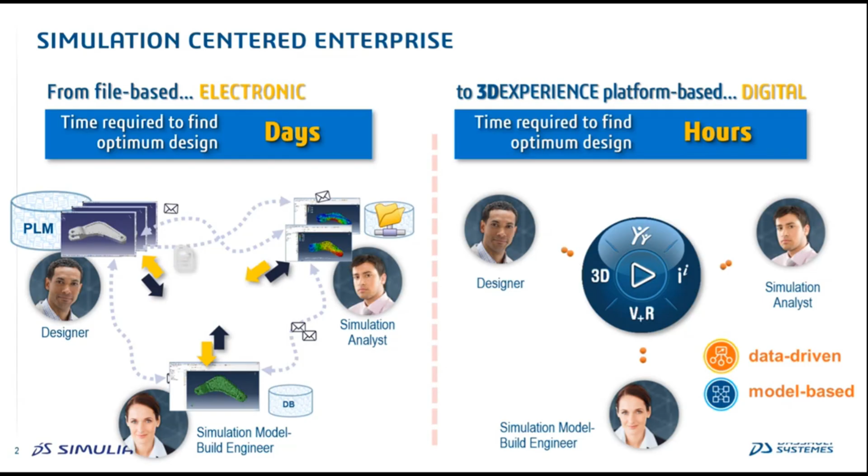You don't have to use email to transfer the data. You don't have to worry about the different versions you are working on. And eventually you actually save a lot of management time, I would say. So this is what we call the ModSim concept. ModSim is short for modeling and simulation. Modeling means somebody who is drawing the CAD, and simulation is someone who is using the CAD file to run the respective simulations.

For instance, you have electromagnetic simulations, you have structural simulations. So this is the part we were focusing on just now. But of course, we can do more. We can do test management. We can do product management. For instance, you have colleagues from the QE department who would like to check the performance. They normally require the simulation engineer to run a few tests to validate their designs.

So they can just specify all the requirements here, and then the people on the ModSim side see the requirements, run the tests, and provide the results. So that gives a complete flow of how we develop a new product. So that is something that is more advanced.

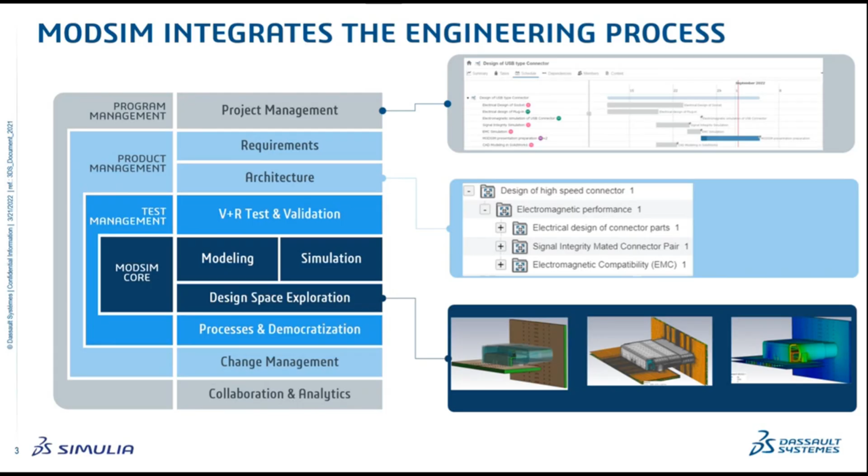in the future. Okay, the first one is the TLM solver, and the second one is DDM. DDM is actually the frequency domain solver. And then the last one is non-parametric optimization. This is something very simple. It actually opens up a new domain to design engineering parts or components.

All right, so let's look at the first one, the TLM solver. The TLM solver is nothing but our transient solver. I'm not sure whether you are aware, but in our transient solver we actually have two types. The first one we call FIT, which is the conventional one that comes together with CST. And besides that, we have this TLM solver, transmission line matrix. This offers a little bit extra on what we can do with the finite integration solver.

Okay, so normally the transient solver is used to simulate very complicated structures, like a mobile phone. If you want to use a frequency domain solver to solve it, then perhaps you'll run into problems like insufficient memory. So when we are using the transient solver, we normally use it for very complicated structures. For instance, look at these mobile phones. We actually have a lot of antennas inside, right? So look at the number of cells.

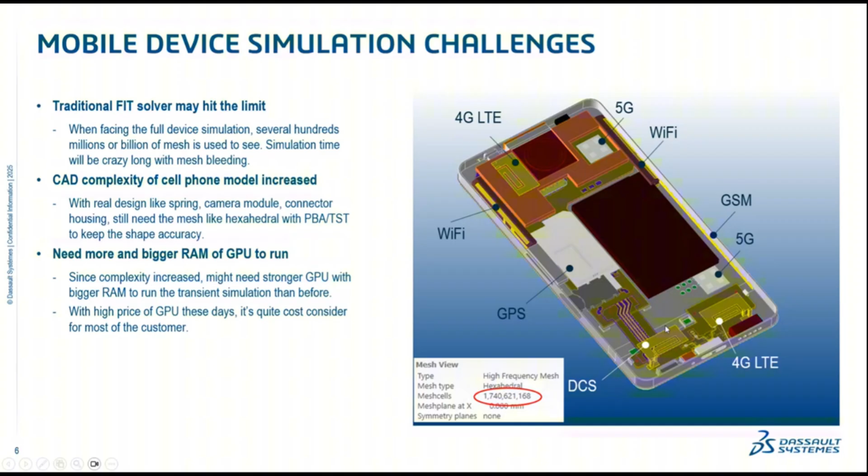It's a lot. Okay. With the conventional FIT, you can see the mesh is going to look like this. But when we switch to TLM, it's going to look like this. It's still the same hexahedral mesh, but over here you can see this area, we actually try to simplify the mesh. For instance, in the area which is not critical, here it is filled with a lot of air. So we try to combine all the cells together to create a cell lumping effect, which eventually brings the number of mesh cells down, reducing the mesh count.

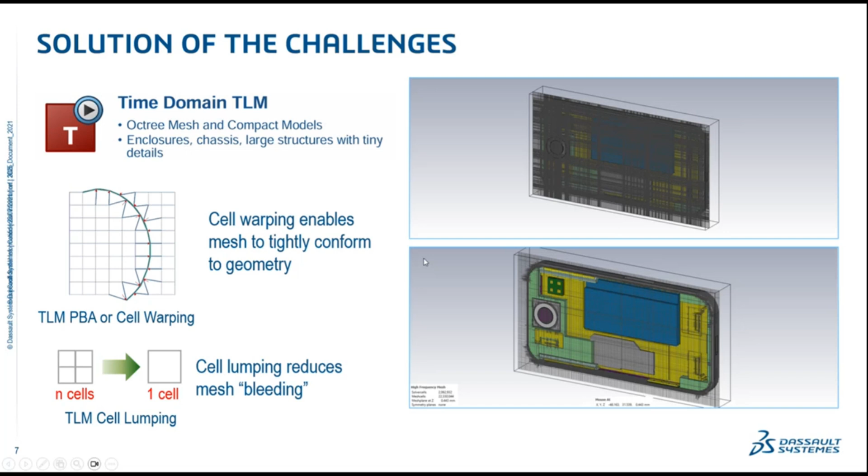That gives us very good efficiency, as in a huge reduction in the mesh count, 99%. So imagine you have 1 billion mesh cells. You end up with 10 million mesh cells. So that's a big reduction, and that will speed up your entire simulation.

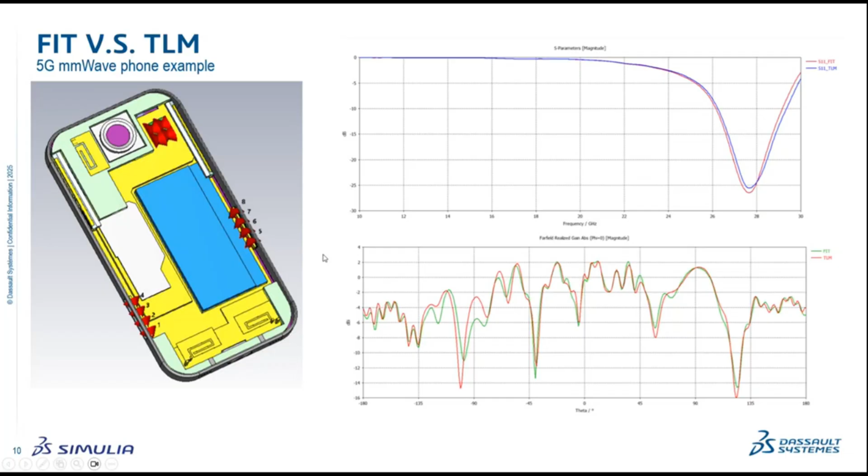Okay, so this is a comparison of the results. You can see this is the S-parameter, and this is the far field result. They are more or less the same. So that means TLM is suitable for these types of applications. Okay, so this is a summary. We are introducing new dimensions to simulate complicated structures.

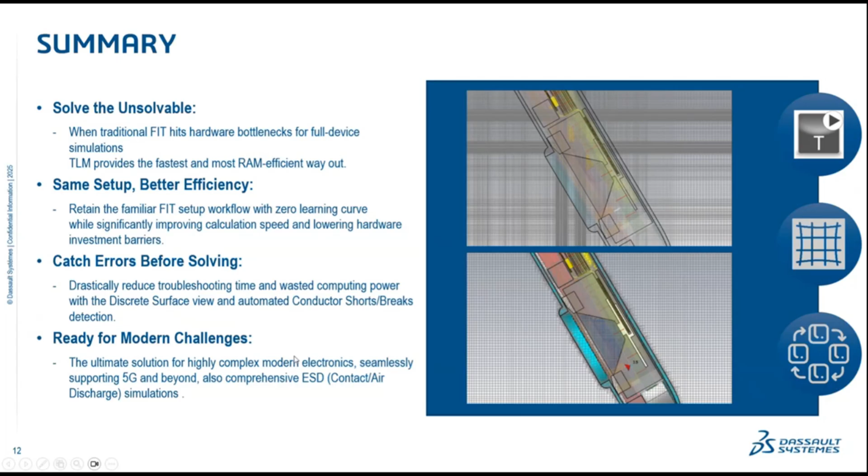It could offer you better efficiency with the same setup. And then I think in modern electronics, I would say that the TLM solver is actually quite suitable to be used.

All right, so let's go to the next topic, which is the domain decomposition solver. Now, this is actually our frequency solver, but they add some extra techniques to make it more efficient. So how this works is, for big structures, you can try to cut it into smaller parts, like what you are seeing here. So this is the entire model, and what we do is we cut it into smaller pieces. Then for each smaller piece, we use the individual cores inside your CPU to solve it. So with that, they're able to achieve better efficiency.

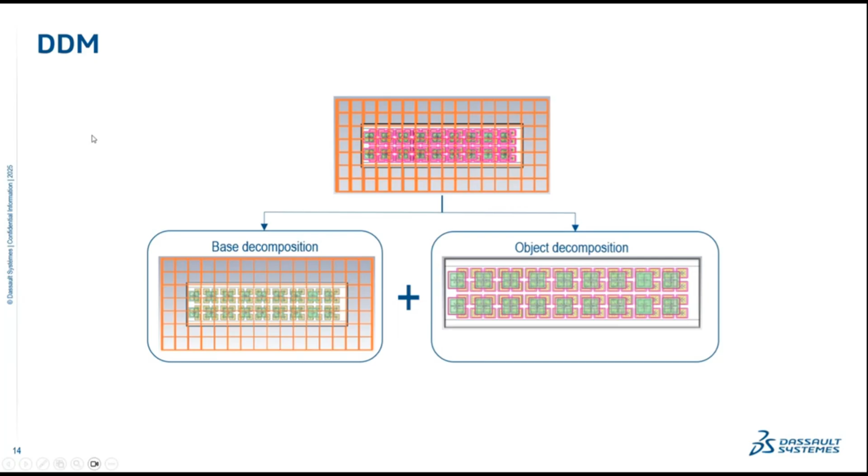Okay, so the bottleneck of the frequency domain solver is, when the mesh required is increasing, you actually need to have more RAM to solve that kind of problem. So it's a non-linear kind of relationship. So what we try to do is keep the mesh cells small, so that the number of mesh cells in these parts is small, so that you are able to operate in the linear region. Then with that, it is able to have very good efficiency in solving those problems.

Okay, so when we are talking about this DDM, we actually see several enhancements. For instance, we try to use this in, let's say, base station antennas. We try to use it in PC boards. We are actually able to see a speed up. At least when some people try to use a frequency domain solver, they are not able to solve the problems because they are heading into insufficient memory problems. But with this DDM, we are actually able to solve these kinds of problems.

Okay, but of course you are not targeting very big, super large structures, because you will still have the memory issues. But we are talking about the reasonable ones. So let's look at what examples we are working on.

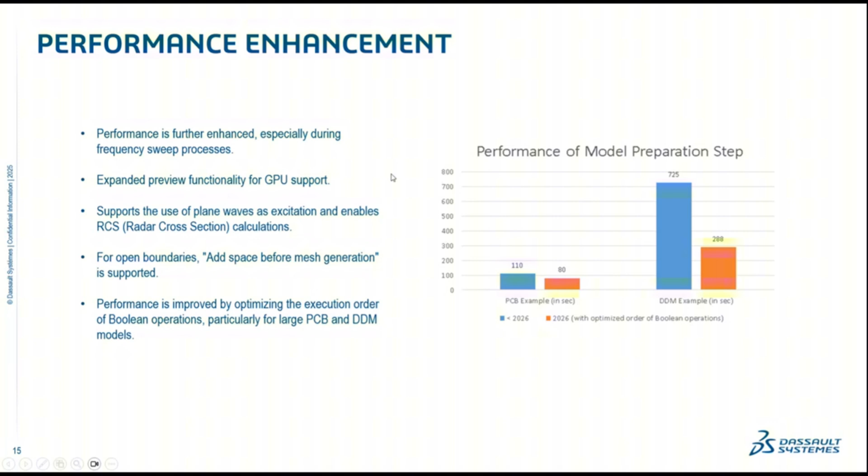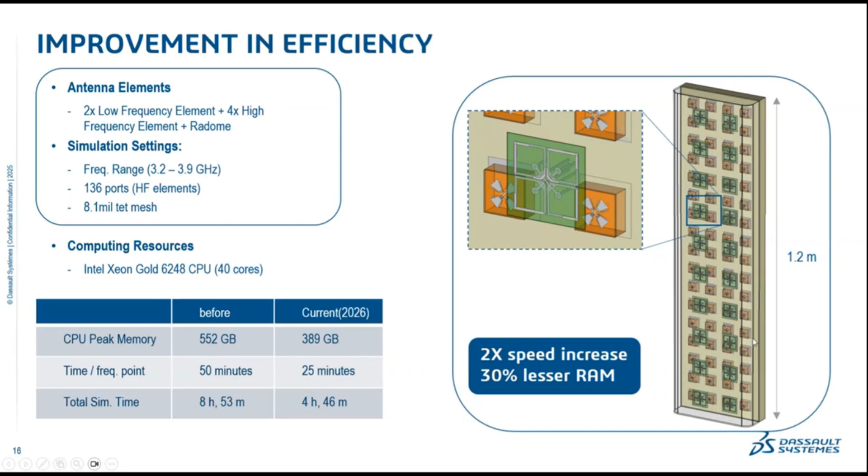Yeah. So when you are running any problems with the frequency domain solver, bear in mind that you need to have a lot of RAM. You cannot expect to run with only 64 gigabytes of RAM and solve such a complicated problem. It doesn't really work.

So in this case, sometimes our frequency domain solver can be more efficient compared to the transient solver. The reason being, in the transient solver, you need to run port by port. But if you switch to the frequency domain solver, you can solve all the ports simultaneously. So if everything fits, like the mesh can fit into the available RAM in the computer, then we would say this is much more efficient.

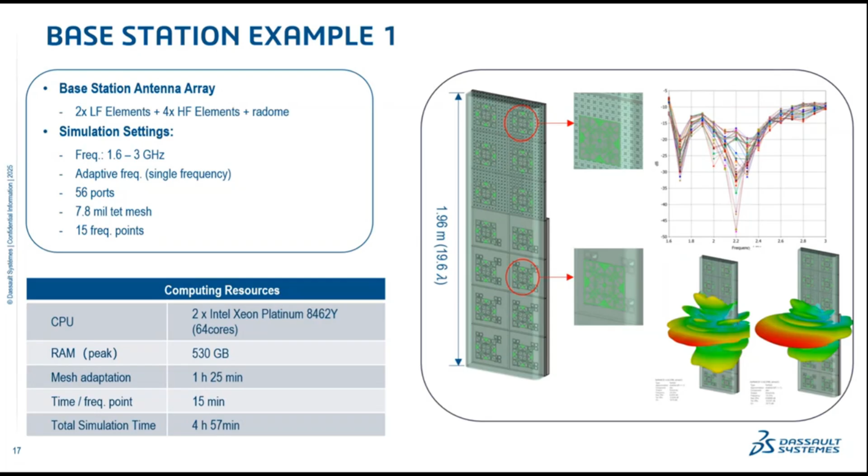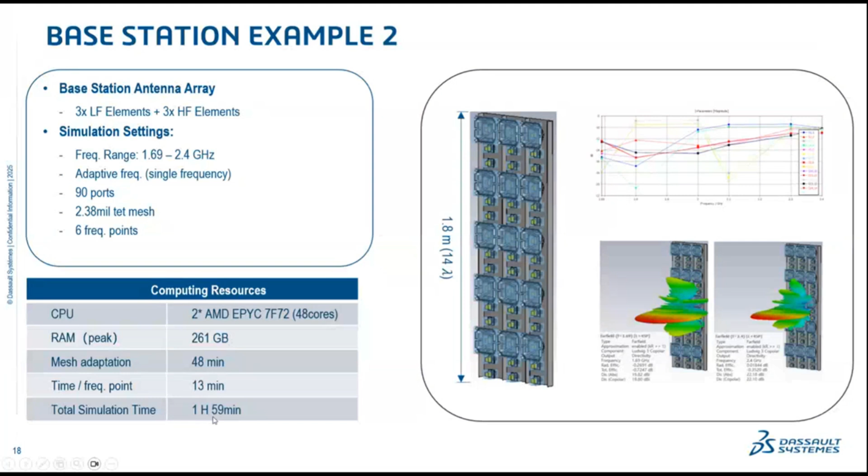Okay, so this is already good enough for us to look at the S parameters, and it should give you the desired frequency response in terms of far field, E field, or whatever as well. Okay, so this is example number 2. You can see the complexity definitely is there as well. And you can see the number of mesh cells is 2.38, relatively smaller compared to the previous one. And then you see we just need 2 hours to complete the simulations.

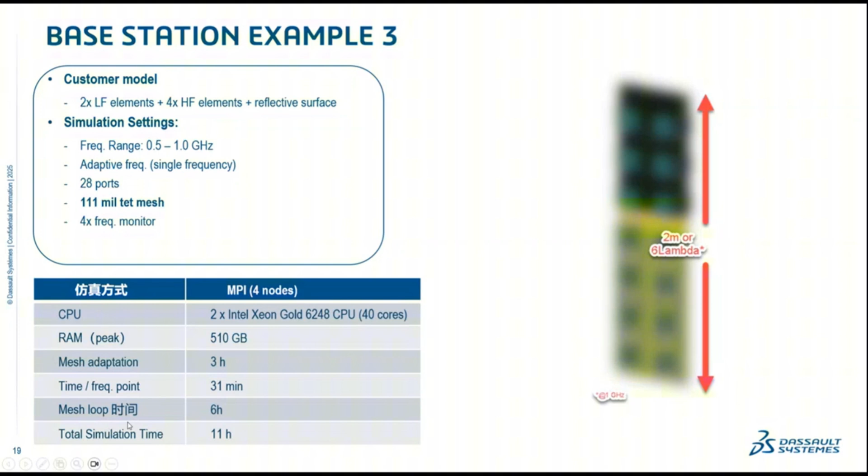So this is another one. You can see the number of mesh cells is 111 million mesh cells. Before, something like this could only be simulated with the transient solver. But with the DDM, it is still possible to simulate this, but we actually need some MPI nodes. We need 4 computers at the same time. We combine them together, and we just need 11 hours to get the simulation done.

All right. So I'm coming to the last part of what I would like to share with you. This is about the non-parametric optimizations. Let's look at what non-parametric optimizations are. The conventional ones we call parameterized optimizations, and the one I'm going to introduce to you is called non-parametric optimizations. Parametric optimization is nothing but when you want to run the structures, you need to have the structures equipped with the parameters. For instance, like this.

So in CST itself, we do have this optimizer. We have several types of optimization strategies, and we have to choose one of them. And then after that, with the parameters you have in the simulation model, you need to tell them how you are going to vary this, what's the range from min to max. But when we come to the non-parametric optimizations, I think the main difference is the structures we want to change don't need to be equipped with any parameters.

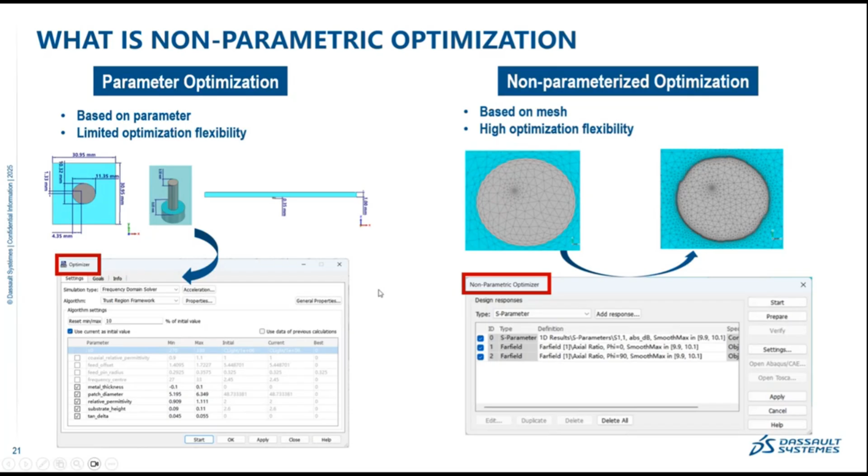So when you are running the optimizations, the first thing is you need to tell them what you want to change. Whether it's equipped with parameters in the parameterized optimizations, or in the non-parameterized optimizations, we just need to tell them where the design space is, which is this one in this case. And the second thing is we need to tell them what our goal is. We change so many things for only one purpose: we want to satisfy our design goal.

All right, so let's look at what is inside these non-parametric optimizations. In fact, this is a technique which is widely used in structural simulations. But after CST was acquired by Simulia, or Dassault as a whole, we found out Tosca is actually the tool that can be integrated together with CST. So that's why we introduced these non-parametric optimizations. There are two types of optimizations here: the first one we call topology optimization, and the second one is shape optimization.

So let's look at the one on the left-hand side. Topology optimization's purpose is to find the functions. Let's say this is a piece of metal you want to cut in the end. What they are trying to do is, you tell them, I want to cut this design space, and I want to achieve my design goal.

So at the end of it, what they do is try to cut this, whether they are going to fill it with, let's say, your metal, or the other one, let's say, your air or dielectric. And then they will keep on running the simulations until they find the shapes that are able to achieve the design goal. So that is what they are doing over here.

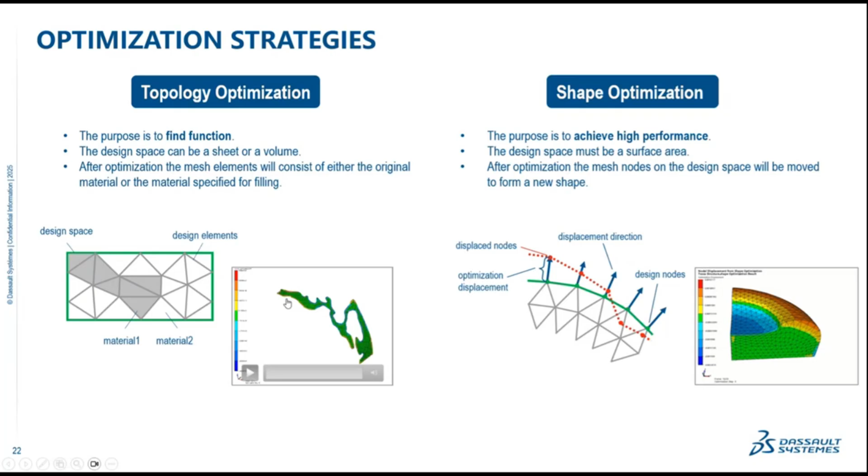So this actually gives you a clue that, with this kind of design space, we actually have a potential to reach the goal we want. Okay, and then the second one on the right hand side is called shape optimization. This is actually able to give you a more concrete answer.

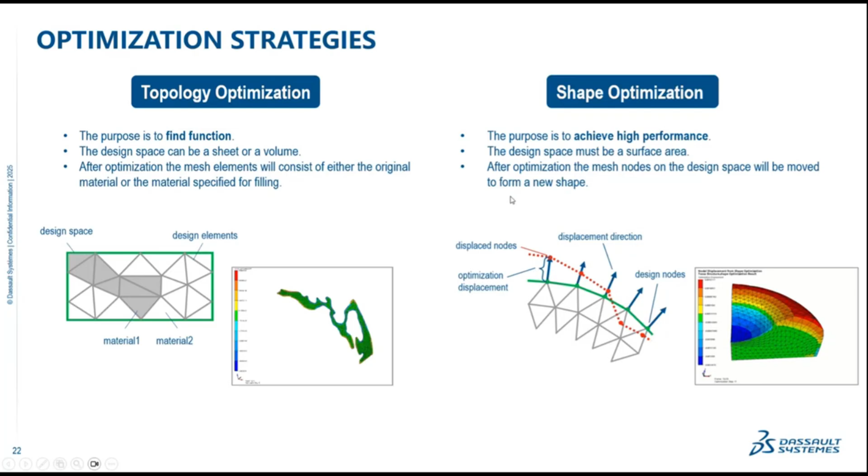For instance, you have a shape like this, which is in 3D. On the surface here we have mesh nodes like this, and then what they will do is try to adjust the positions of the nodes up and down so that we are able to find a more accurate answer to your design goal. Okay, so these are the case studies on the example we are doing.

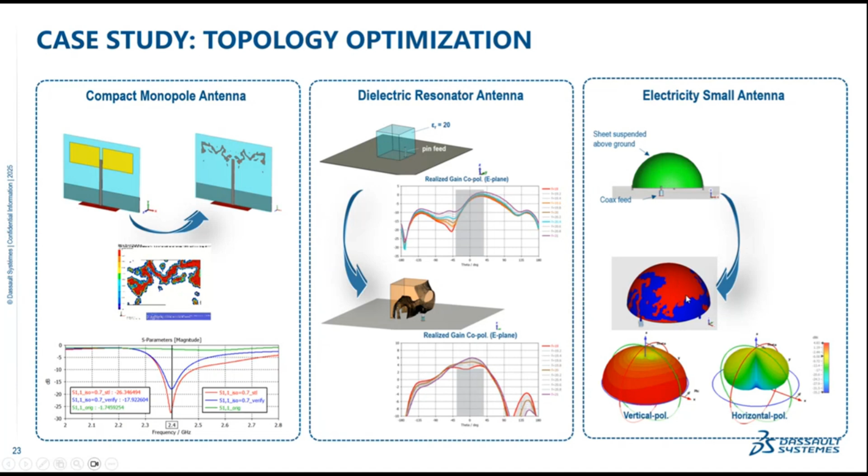Because this is actually calculated, and in this area they will tell you: if I reserve 50% of this material, am I going to get the desired result or not? Of course, that gives you some confidence in this particular design tuning. In the center, this dielectric resonator antenna is doing the same thing as well. And this is the electrically small antenna, perhaps a sheet on this particular radome, and we play around with these shapes. This is what we are getting in the end.

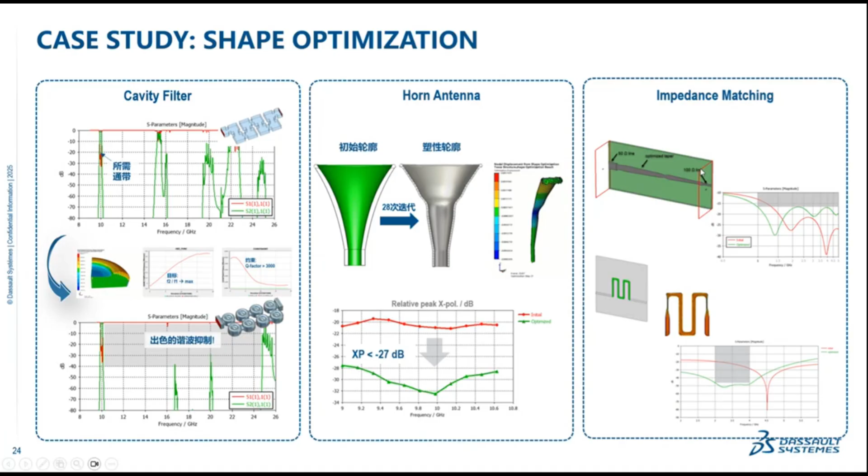All right, so the next one is shape optimization. Here you can see these are 3D shapes. We are working on the cavity filter, horn antenna, and also impedance matching. I'll focus on this matching. For instance, you have a PCB board, and normally for impedance matching you need to calculate the width of this transmission line. With shape optimization, we go to the surface on the outer side and tell it to change this arbitrarily so that we get very good impedance matching.

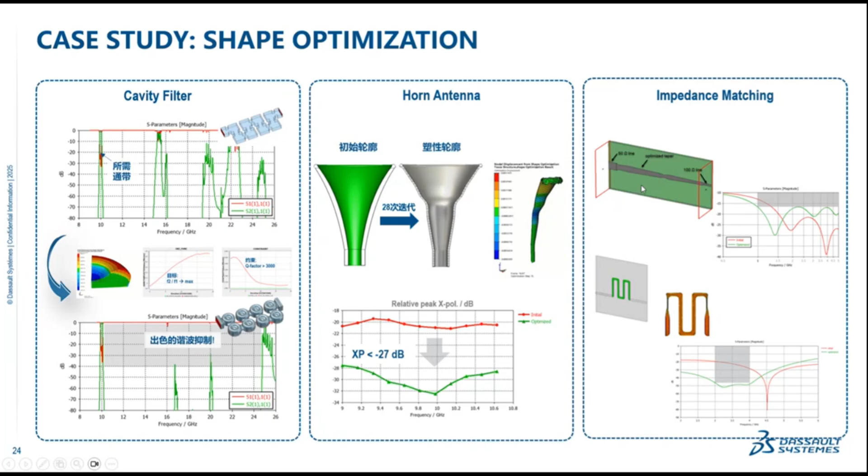Let's say from 1 gigahertz up to 5 gigahertz. Initially, you can see the performance at 1 gigahertz is bad. But after we run the shape optimization, at least we are able to achieve the desired return loss at 1 gigahertz, so I would say this is pretty good. Otherwise, it's difficult to come up with a shape like this by hand. This non-parametric optimization can actually do the job.

Of course, we extend this to antennas as well. Non-parametric optimization can be supported in unit cell simulations. For instance, if you are working on antenna array simulations, the first thing you would start with is unit cell simulations. From those, we already get a good feeling that a shape like this gives the performance I want, then I can proceed with the full array simulation. That will increase the efficiency in the end.